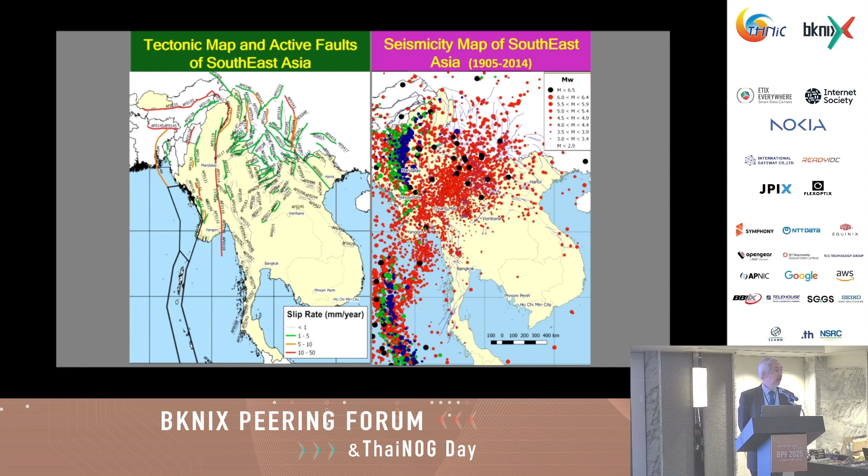In this region, you can see one long active fault that is called the Sagaing Fault. It is in the center of Myanmar, passing through many cities - Mandalay, Naypyidaw, Bago - and passes close to Yangon and goes down to the sea. So this is one of the most dangerous active faults in this region. And if we compare with many other active faults around the world, this one ranks in the top 3 in the world level. So this is the present condition regarding the earthquake.

Now, as most of you know, on 28 March this year, we had a large earthquake happening along the Sagaing Fault. It started around the Mandalay location, near the city of Mandalay in Myanmar. But it was created by the slip, or in engineering we call it the rupture - it's a kind of slip movement. One side goes north, one side goes south. So this slip along the fault, starting from Mandalay down to Naypyidaw, more than 300-400 kilometers long.

So you can see the red zone. Along this red zone, the ground shaking was extremely strong. And as you can expect, many buildings collapsed, many buildings damaged, a large number of casualties, mostly concentrated along the red zone, the yellow zone. But what surprised most of us is the impact of this earthquake then spread as far as Bangkok, about 1,000 kilometers from the epicenter, which is in Mandalay.

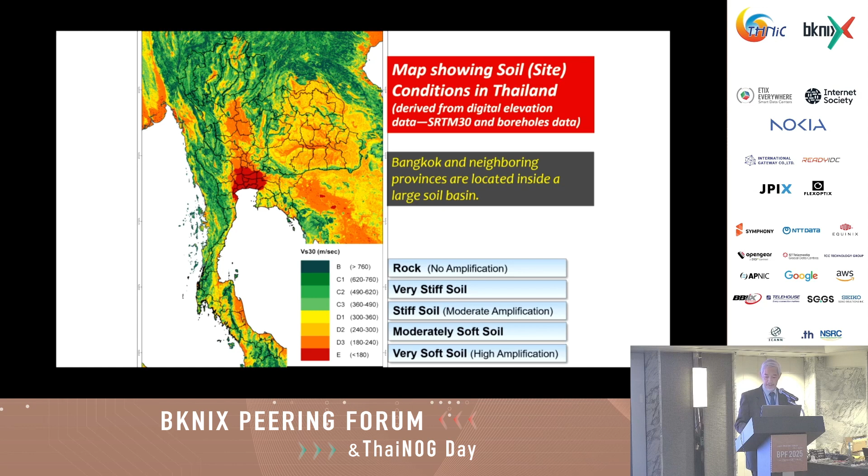Let me show you some examples from the past. Many years ago, we had a 6.8 magnitude earthquake in the north of Thailand, on the borderline between Thailand and Myanmar. We recorded the ground motion, one on hard soil in Surin province, another one in Bangkok on the soft soil basin.

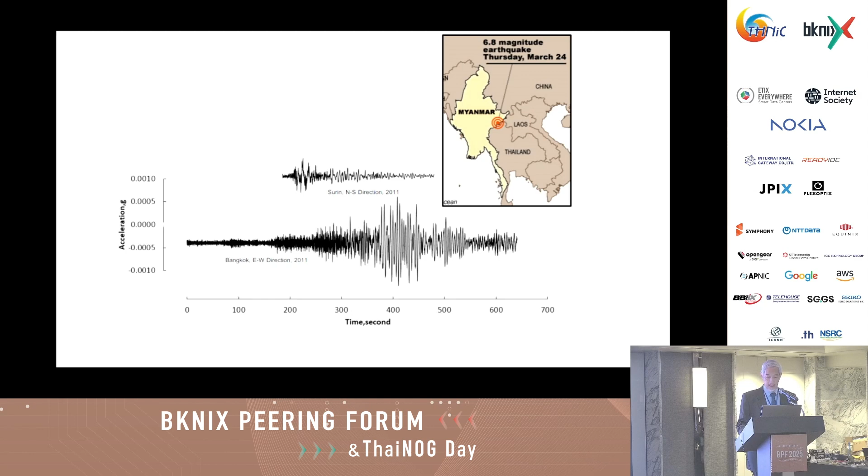If you compare them, the ground motion record in Surin is much lower in magnitude, in intensity, compared to that in Bangkok. And from this, we can calculate the impact of ground shaking to buildings in Bangkok and in Surin, converting the ground motion into a calculation of impact to the building.

But roughly, for a 10-story building, the natural period will be about 1 second. A 20-story building, natural period will be about 2 seconds. A 30-story building, about 3 seconds approximately. This is just to give you some rough idea.

And what you can see here is that buildings in Bangkok will have much more earthquake effect compared to those in Surin, because of the amplification effect of the soil basin.

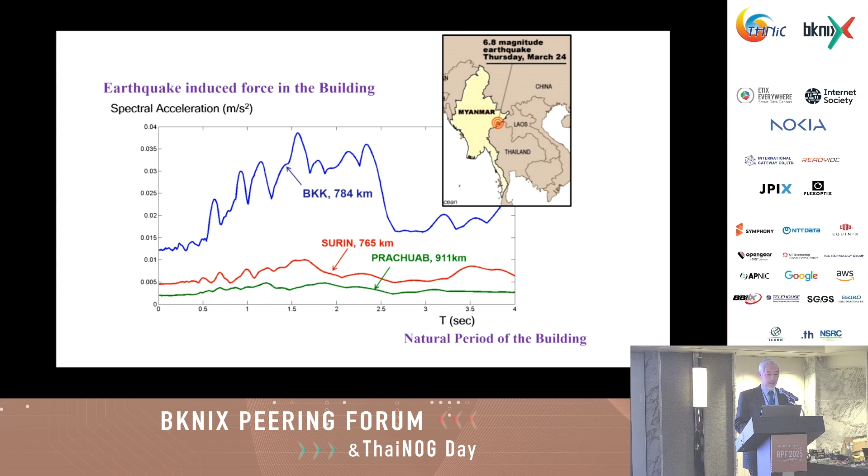Another point we can see from this graph is that buildings with relatively longer periods—1 second, 2 seconds, 3 seconds—will have more impact than buildings with shorter periods. So let me try to explain this point, I'll try to make it simple.

If the ground moves slowly, at a vibration period about 5 seconds, it's going to shake the long period structure, the tall one, because there is a matching between the ground movement and the vibration period of the structure. This is called the resonance effect.

Now, if we change the way the ground moves, making it move faster at a shorter period of 2.4 seconds, it's going to produce more impact to the middle one, which has a natural period matching the ground motion period.

And if the ground moves at a shorter period, high frequency, it's going to shake the small one.

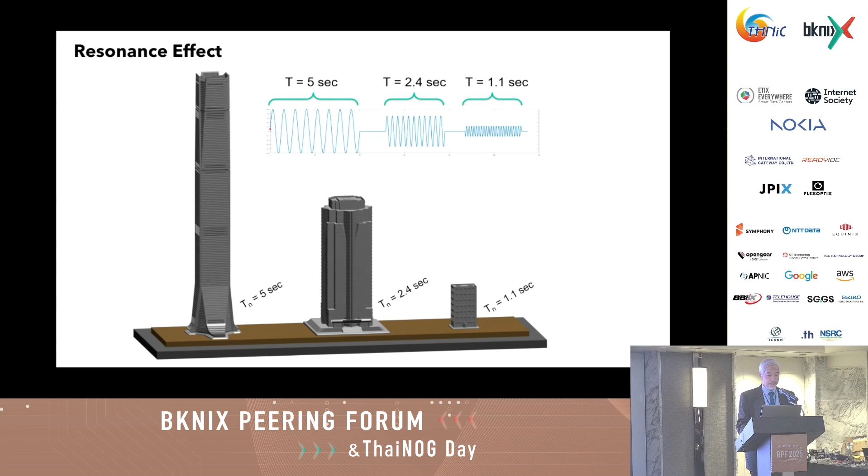Because of this question, our team spent many years investigating the Bangkok basin, applying a technique called array microtremor measurement. We conducted surveys at many locations inside this large basin, and we obtained the dynamic properties of the soil basin and the basic geometry of the soil basin.

This helps us make a model of the soil basin, and we can predict its amplification characteristics. We can determine what type of vibration period it will amplify, and how strong it will amplify it.

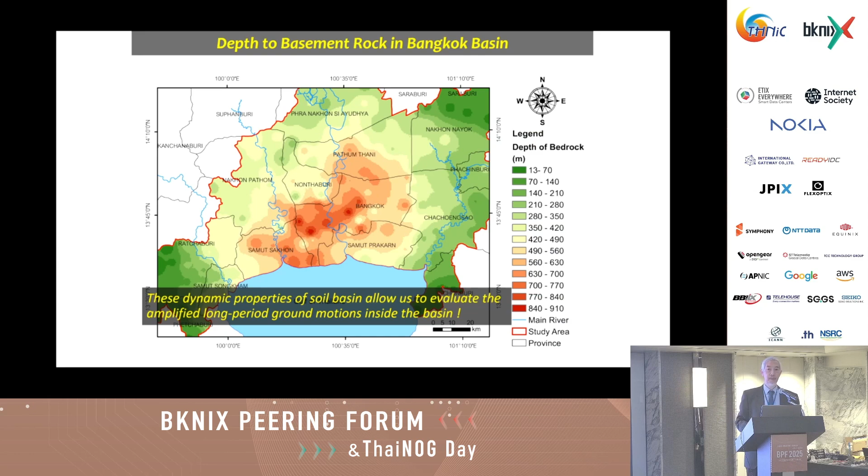After knowing the property of the basin, we combined it with seismic hazard assessment, considering all the possible earthquake sources, the distance from the source, and everything. We came up with a conclusion that Bangkok and surrounding provinces are at risk of disaster from distant large earthquakes.

I made this slide many years before the event on 28 March, and it's still true. We concluded that the city lies on a large and deep soil basin, which can strongly amplify long period ground motion. A large number of high-rise buildings with long natural periods will be strongly shaken by the resonance effect with this amplified ground motion.

Our team also predicted three possible earthquake scenarios that are quite dangerous for tall buildings. The first one is an earthquake of magnitude 7 to 7.5 in Kanchanaburi province, which is around 200 kilometers in the western part of Thailand.

The second one is an earthquake of magnitude around 8 at the Sagaing Fault in Myanmar. This second scenario already happened on 28 March. And the third one is an earthquake of magnitude around 8.5 to 9 at the Arakan subduction zone, which is on the western part of Myanmar.

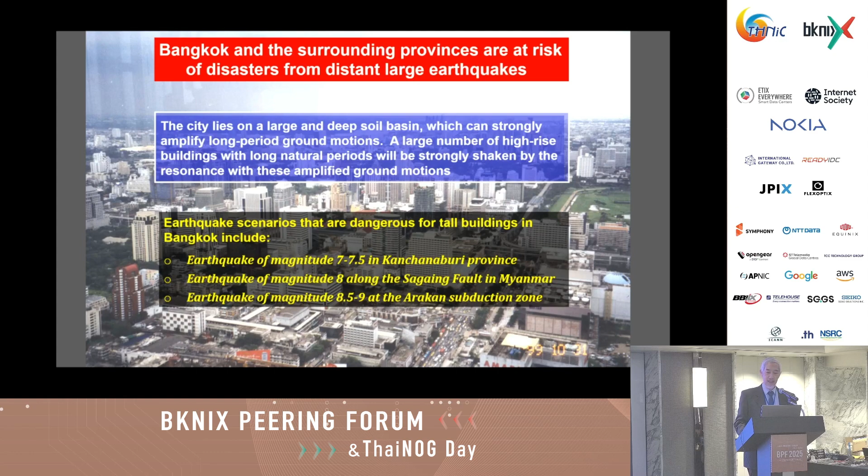But probably we are wrong. It just happened. After making this calculation, we explained that this is a rare event, but for some reason it has already happened.

Of course, after knowing this, we have been preparing for such a dangerous earthquake. We have a ministerial regulation that requires buildings to be designed and constructed for earthquake resistance since 1997. Ten years after that, in 2007, we expanded the control area to cover Bangkok and surrounding provinces. This means that since 2007, all tall buildings in Bangkok are required to be designed and constructed for earthquake resistance. That's the way we prepare for earthquakes.

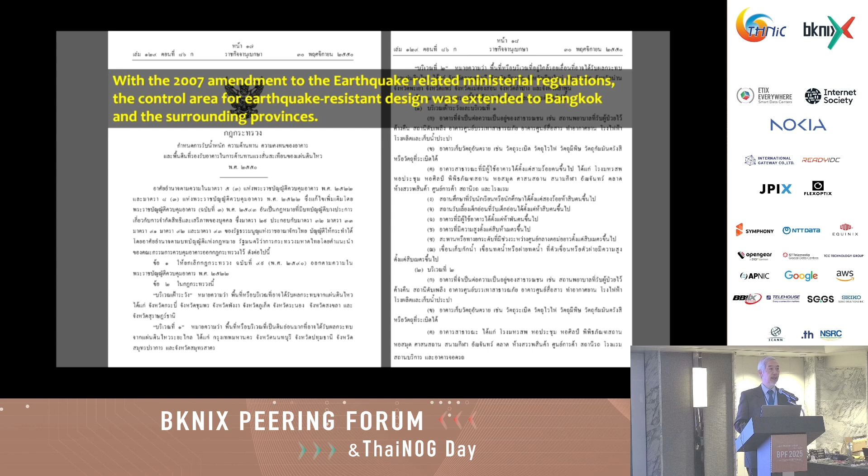We also developed a kind of national standard for seismic resistant design for buildings and structures. This is a new version, but the first version was issued in 2009, and this is a revised version from 2019.

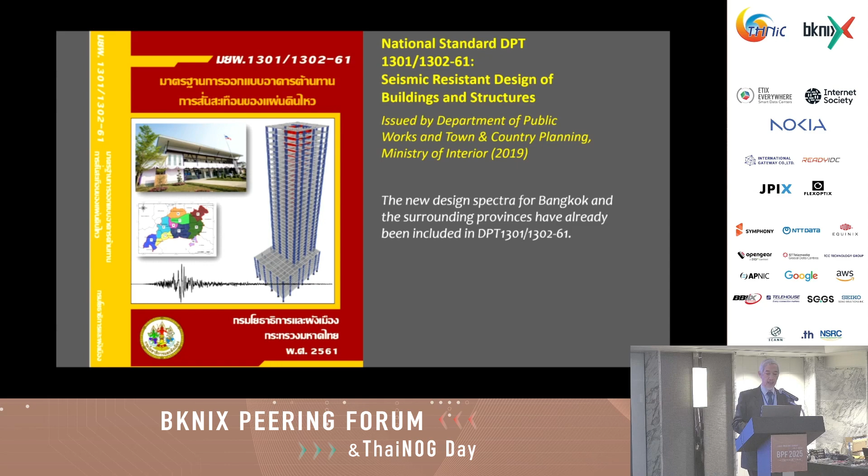In this national standard, we actually divide the Bangkok basin into 10 different zones, and each zone has a different design spectrum. The design spectrum defines the level of earthquake impact on different buildings with different natural periods. You can see a graph with 10 different curves for the 10 different zones.

So this is the best estimate before we had any earthquake, based only on the scientific information we had. Bangkok is in zone 5, and you can find the zone 5 curve on that graph. That is the way we tell our engineers that you should be prepared for earthquakes, and you should design your buildings and structures for this level of earthquake intensity.

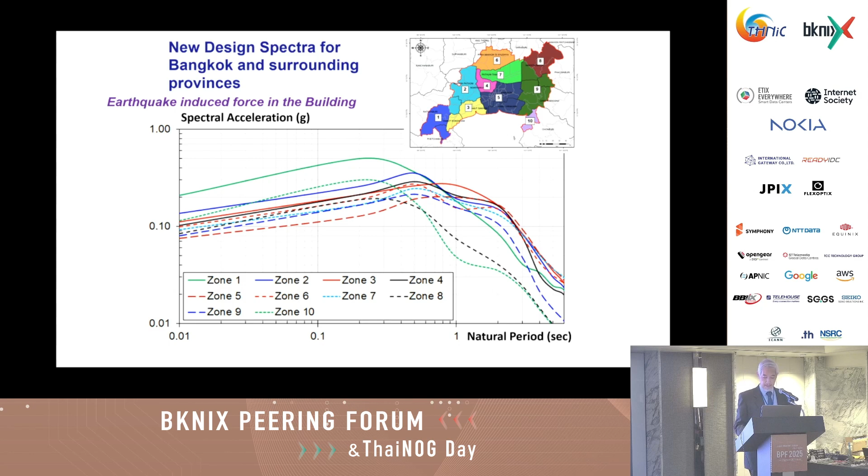And then it happened. On 28 March, the ground was shaken, and in Bangkok we have about 5 seismic stations available. From these seismic stations we have ground motion sensors, and we have recorded ground motion time histories available. So we can see how the ground moved, how the shaking looked like.

This is the station near Phra Chom Klao, Thonburi, KMUTT University. And this is near Sirikit Convention Center. So we have about 4 or 5 stations available.

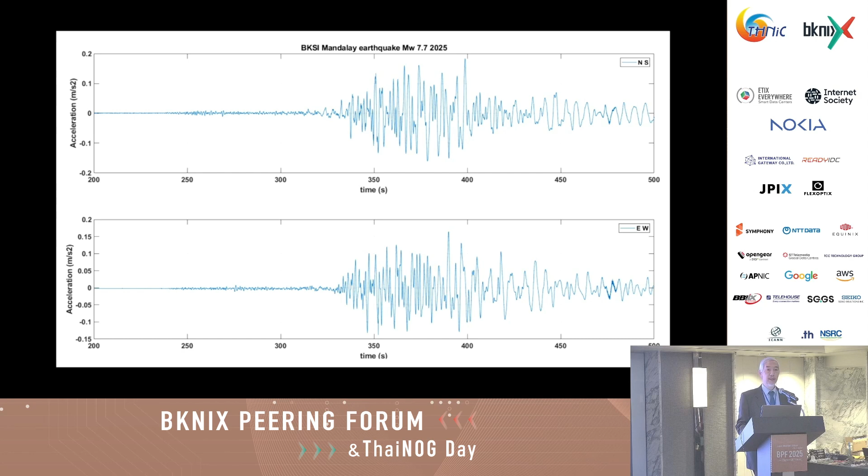The first thing we did after we obtained this record was to compare the ground motion record with what we put into our standard. So here's the graph. The vertical axis shows the spectral acceleration, which is related to level of earthquake-induced force in the building. The horizontal axis is the natural period. You can see the yellow curve and the violet color curve.

This represents the design basis earthquake, or DBE, and maximum considered earthquake, or MCE. This represents the maximum level of earthquake we expect to happen in Bangkok, with a very long return period of 2,000 years. The one that just happened on 28 March was the curve below in a different color. It was not as high as DBE, it was not as high as MCE, but when you look at the long period range, it's somewhat comparable.

And even for longer period range, at 6 seconds, it's slightly exceeding the level we estimate. Anyway, overall, we think that the ground motion that happened on that day, although it was the strongest ever experienced by most people here, strongest ever experienced by people in Bangkok and by tall buildings, is still within the limit that we tell engineers to design the buildings for. So if they follow the regulation properly, we should not see any disaster.

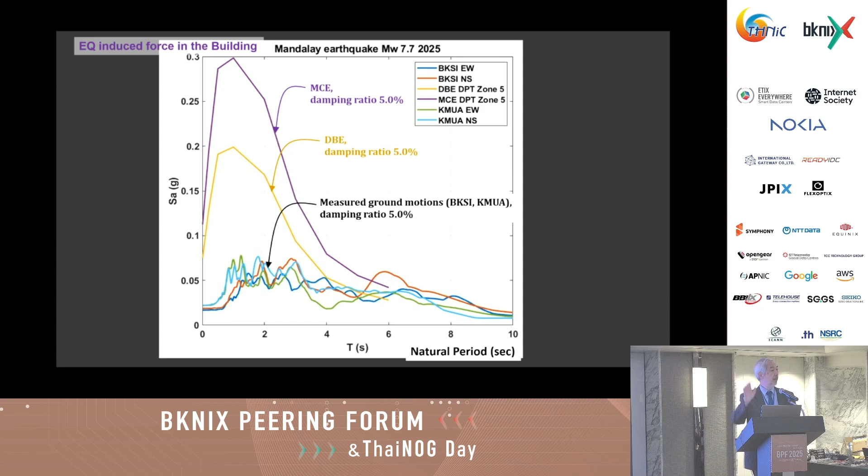So this is a rough statistic I got from the Thailand Structural Engineering Association. They conducted many surveys by volunteer structural engineers, and reported that around several hundred buildings have damage to non-structural components like masonry walls, partition walls, ceilings, elevators, and many other non-structural elements. That's several hundred buildings, which, although not impacting the structure, actually gave a strong impact to the functionality of the buildings.

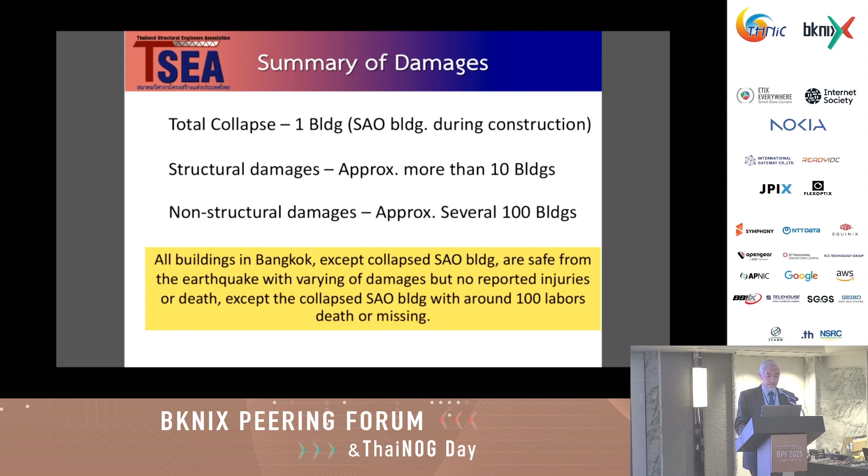And we have just about 10 buildings that have damage to structural components, especially the reinforced concrete wall, which is considered an important structural element. And one building, a state auditor office, a new building, completely collapsed. That collapse is beyond our expectation.

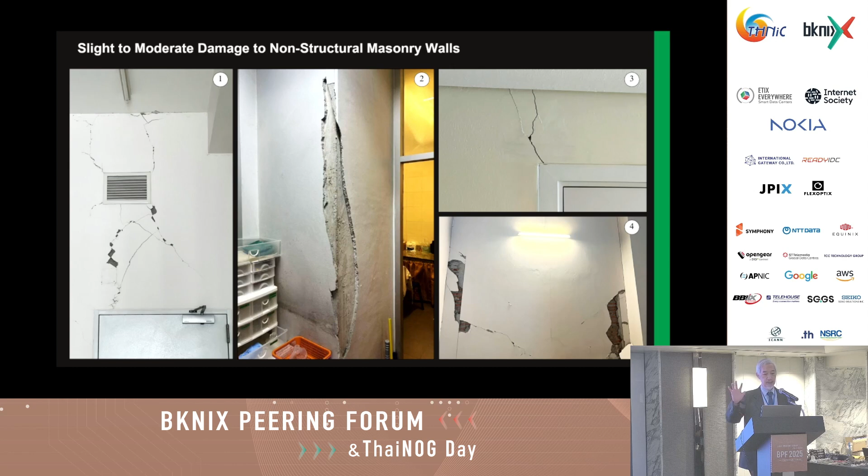So this shows you the idea of slight to moderate damage. I show you just the damage to masonry walls and partition walls. This is a small level, slight to moderate. But in some buildings, we can see more severe damage where you can see through to the other side - this non-structural wall damage is not affecting the safety of the structure.

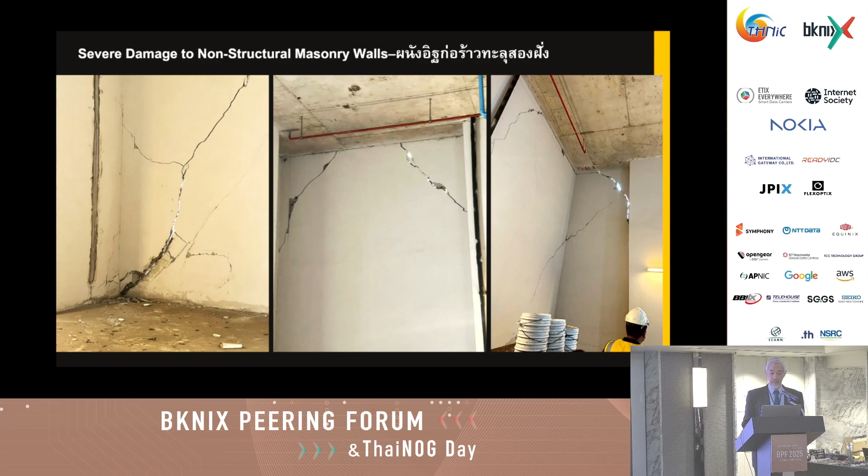But in less than 10, or around 10 buildings, we have this level of damage we call significant structural damage, where you can see damage to the structural wall. This is a reinforced concrete wall - the concrete crushed and the reinforcement steel bar buckled. This appears to be quite dangerous. This is beyond what we expect.

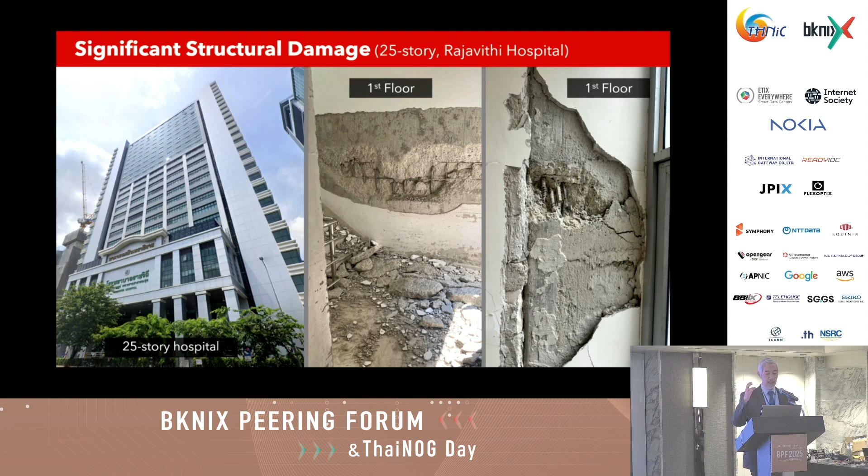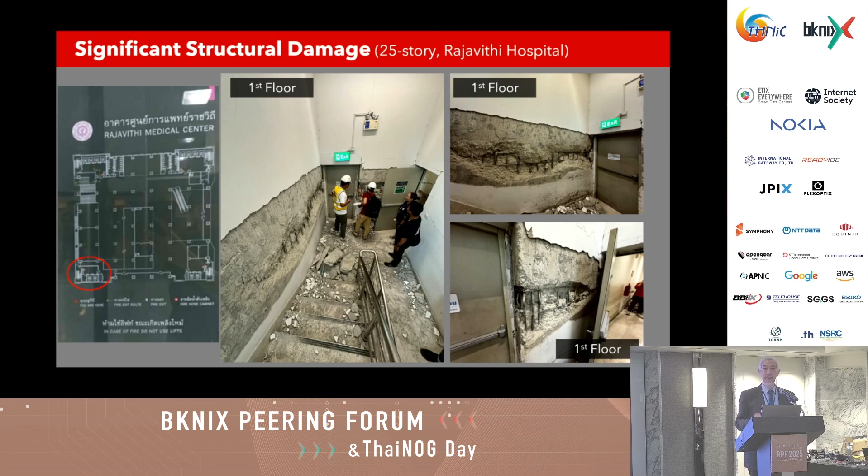And the type of failure is considered to be a brittle form of failure, which is quite dangerous because when this happens, it means the structure cannot deform further. If it's subject to slightly stronger shaking, it may lead to danger - it may lead to collapse. So damage to structure is the main concern for structural engineers.

And this is another one - tall buildings with damage to structural walls all around. Fortunately this one is still standing, and some brave engineers are trying to repair and reinforce the structure.

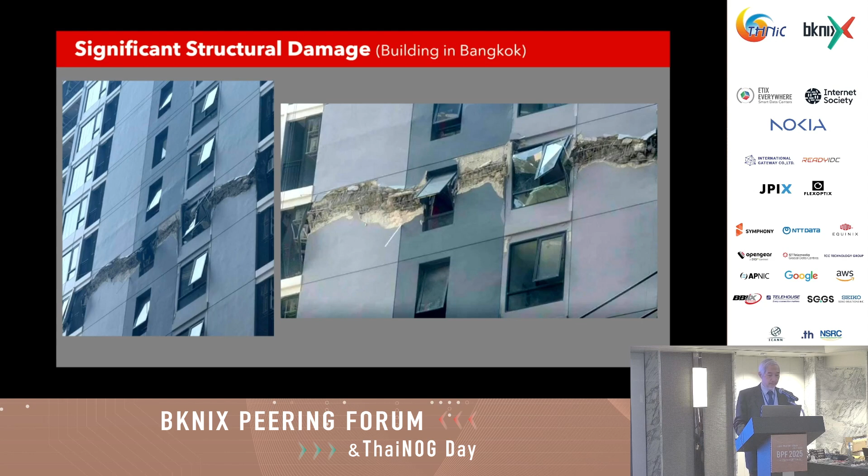So when we compare with damage reported elsewhere, I think we find more or less the same picture. This is in Chile, when subject to a strong earthquake - many structures with shear walls, with reinforced concrete walls, also damaged in a similar pattern.

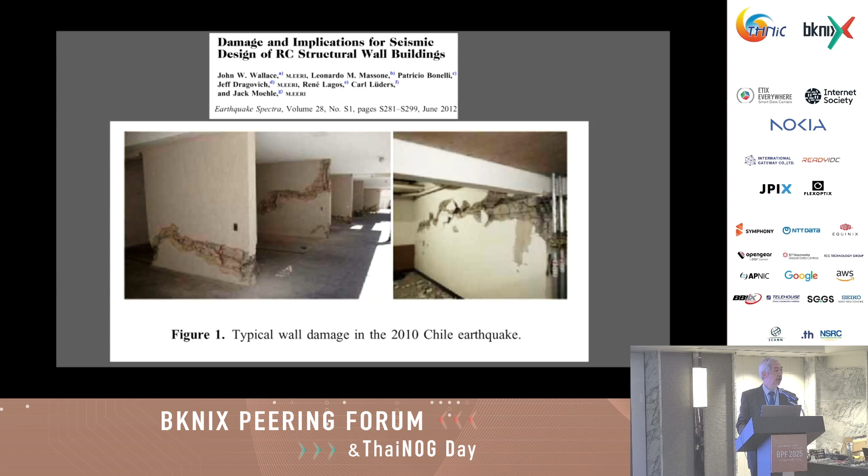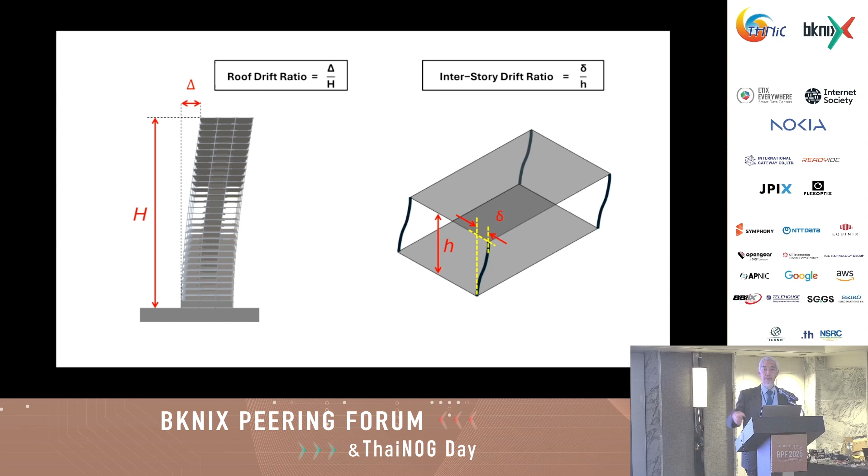We are actually trying to learn from this event, collecting data to understand its impact on many different buildings. So we're trying to calculate one index that we think will best represent the damage level: the maximum rooftop displacement of the structure, called roof drift, divided by the height of the building, delta over h, which we call the roof drift ratio. We believe the damage to buildings, large or small, will be roughly proportional to this index. After using the available ground motion data, we calculated the roof drift ratio, and it came out like this.

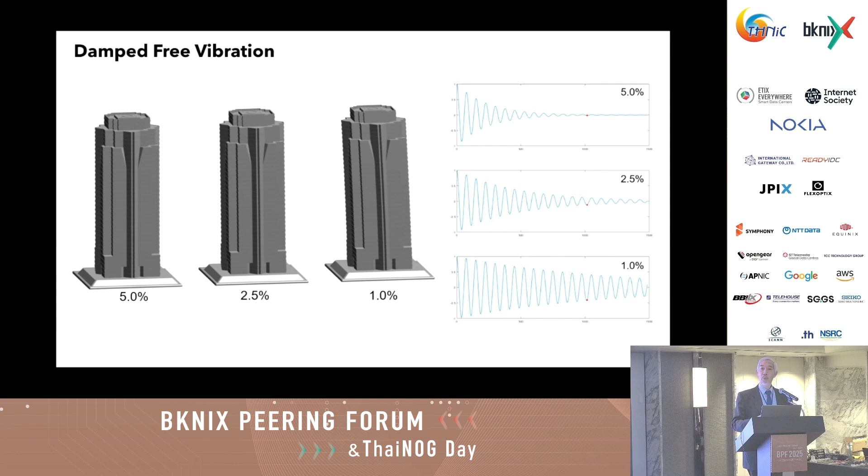Why is this point important? Because if we check these 3 buildings with different damping under the same ground motion, the one with 5% will not have high amplitude. The one with 2.5% will have higher amplitude. And the one with 1% will have the highest amplitude. So this controls the level of impact of earthquake on a tall building through this important parameter.

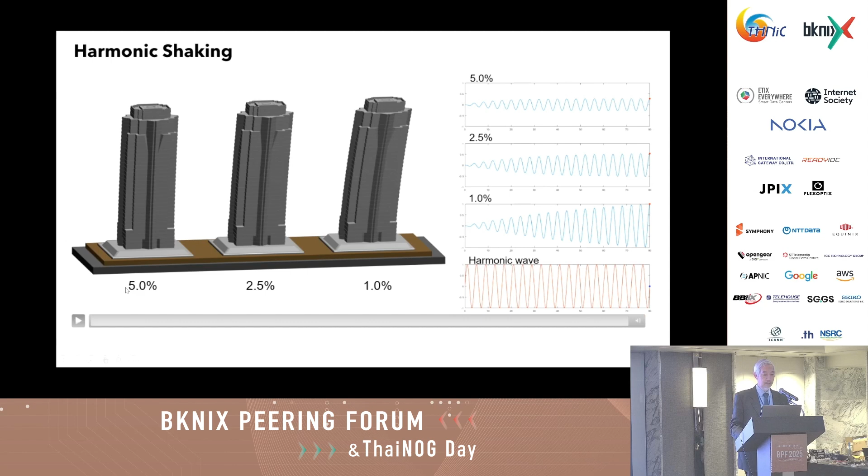But that is the calculation from one ground motion. That ground motion is from a station near Chatuchak area, near the Bangkok Metropolitan Administration Office.

How about the structure? We've been talking about impact to non-structural components. If a structure is properly designed, made ductile, well designed for earthquake resistance, I think we can go up to 2%, not this level—this level is about 0.6 to 0.7 percent maximum. But if we design a structure to deform well, a ductile system, we can go up to 2%. So we don't have to worry about this level of earthquake if we implement proper seismic design.

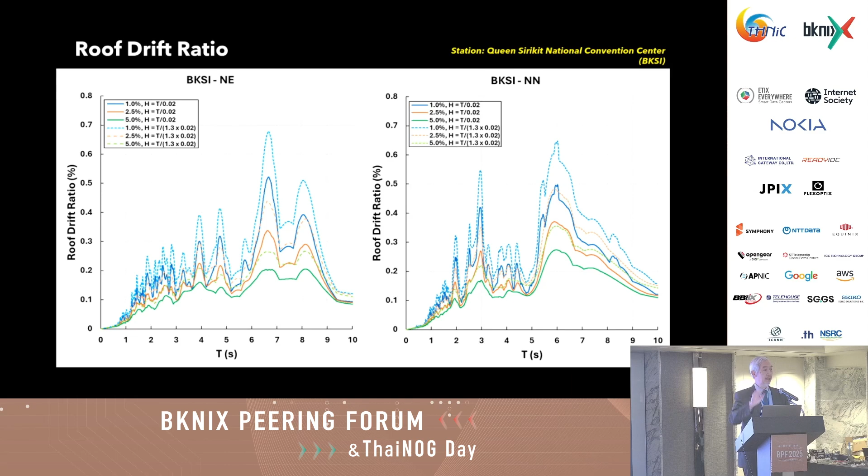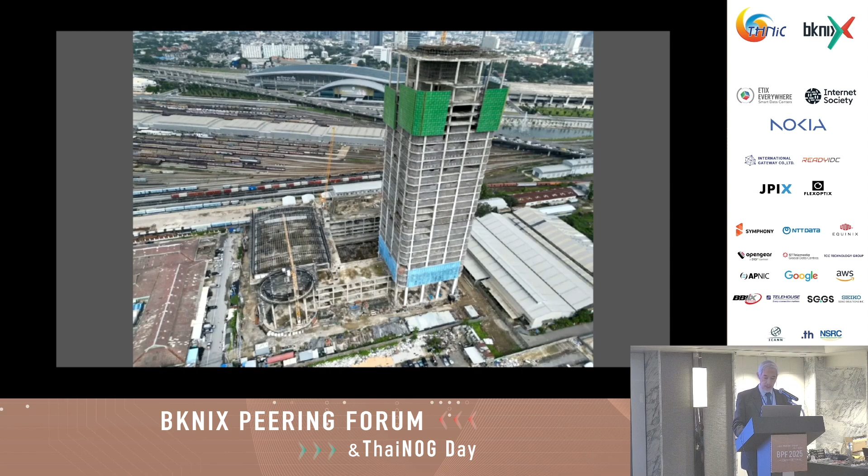So this is for the Thonburi side. Now, this is the State Audit Office, the one that collapsed. We also made some calculations. The reason for the collapse is still under investigation, which I cannot say yet, but I am a member of the investigation team. Initial analysis shows that it falls into the range near the peak of 3 seconds, so it's possible it experienced a stronger impact than many other buildings, because its natural period happened to match the peak effect, as you see in the graph. That is one of the key factors leading to the collapse, but there may be many other factors—that's another story to tell later.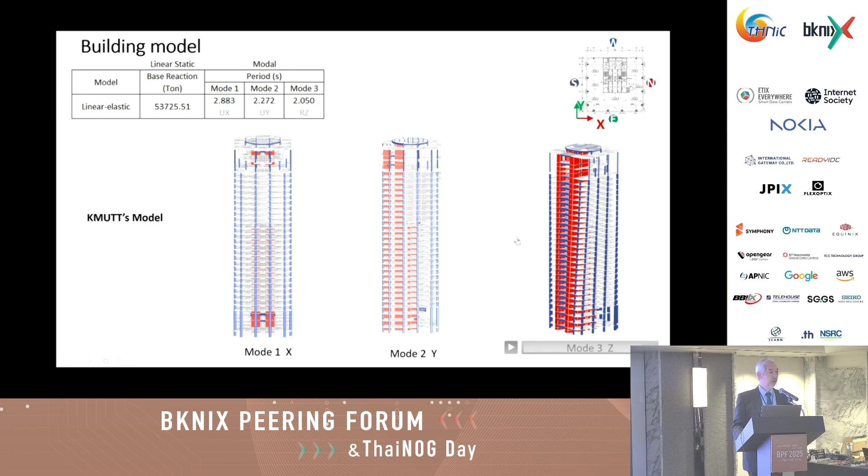Now I come to the last part. So what do we have to do, or what do we need to prepare for future earthquakes?

As you can see here, this is the Sagaing fault. The rupture is from Mandalay to Naypyidaw. The rupture does not go from the top to the bottom of the fault yet—the fault is more than 1,000 kilometers long, and only part of it has ruptured. In the future, it may continue to rupture from Naypyidaw, passing through Bago and Yangon, and down to the sea. So we have to assess how much of a possibility that is.

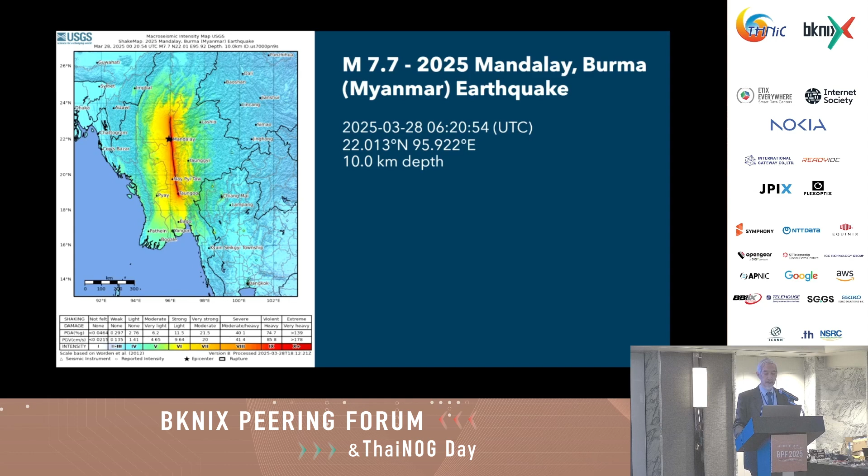To understand that, we have to look at the history of earthquake ruptures along this fault. I put it horizontal instead of north-south. This shows the time, and this line shows the rupture zone. The recent one ruptured between here and here, from Mandalay to Naypyidaw. The other horizontal lines show ruptures in the past. In Mandalay, there were ruptures in 1956 and 1912. In Naypyidaw, there was a previous rupture in 1839. So it doesn't happen easily—the past event in Mandalay was many years ago, and the past event in the Naypyidaw zone was nearly 200 years ago.

How about the possibility of rupture from Naypyidaw down, passing through Pyu, Bago, and Yangon? The past event there was around 1930, so that's about 90 years ago.

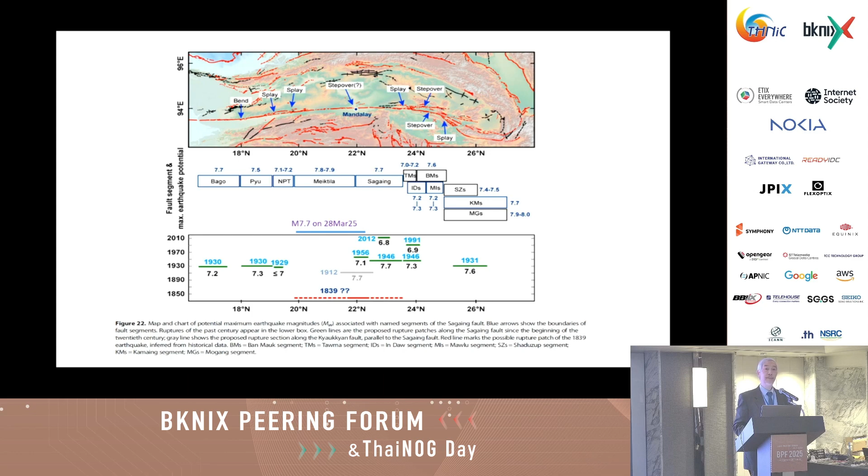If it happened like this one, 1930, 7.3, 7.2, the impact to Bangkok may not be that strong. But if it's a long rupture, 7.7, like the one on 28 March, the impact will be stronger than what you experienced on 28 March, because it becomes closer.

So what we think, there's several ways to do it. One way is do nothing, because the chance of it happening is quite rare. The chance is low.

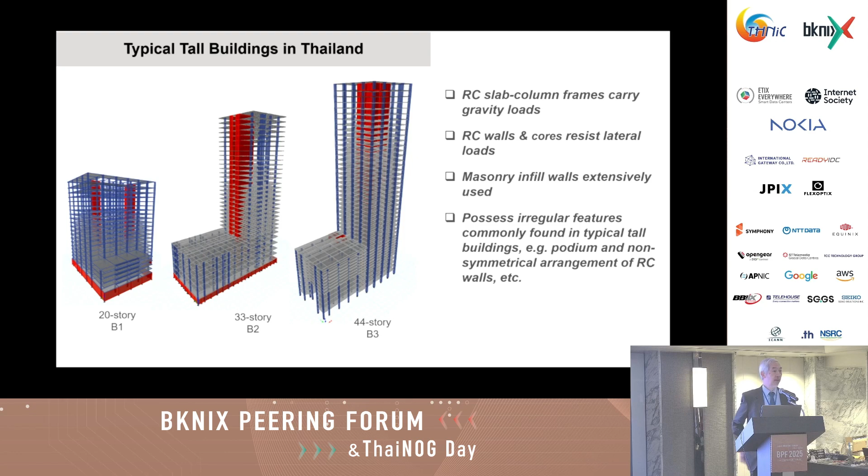Another way is to improve the structural system for future buildings. We think it's possible to make the structure more resistant to such long period ground motion. I will not go into detail, but the idea is summarized in one keyword.

We want a ductile structural wall. It is possible to design the reinforced concrete wall to be more deformable, more ductile.

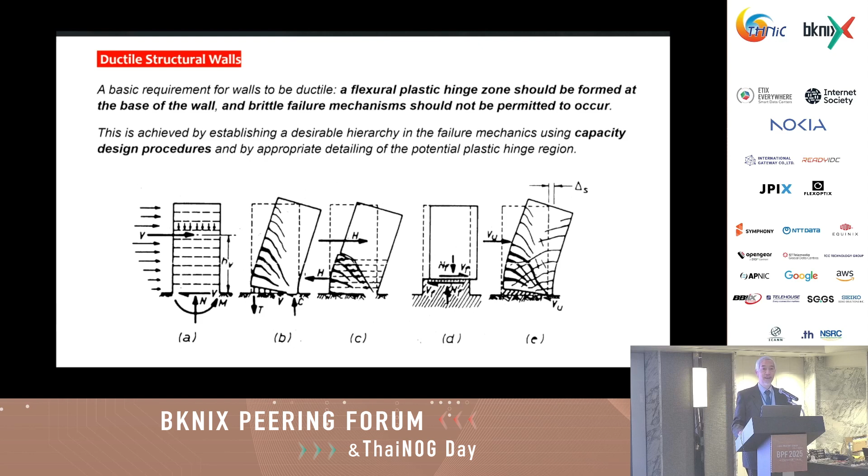But in engineering, to do that, we should make sure it will not fail in brittle mode. There's a long list of brittle failure mechanisms. So in order to make the wall ductile, structural engineers will have to control and make sure all these brittle modes will not happen. They have to take care of all this detail — make sure it will not fail in shear, will not fail by out-of-plane instability, will not crush.

All this can be done by good engineering practice. In the past, we had that in the standard, but it may not have been that clear. But after this earthquake, I think we are going to focus more on this and improve further.

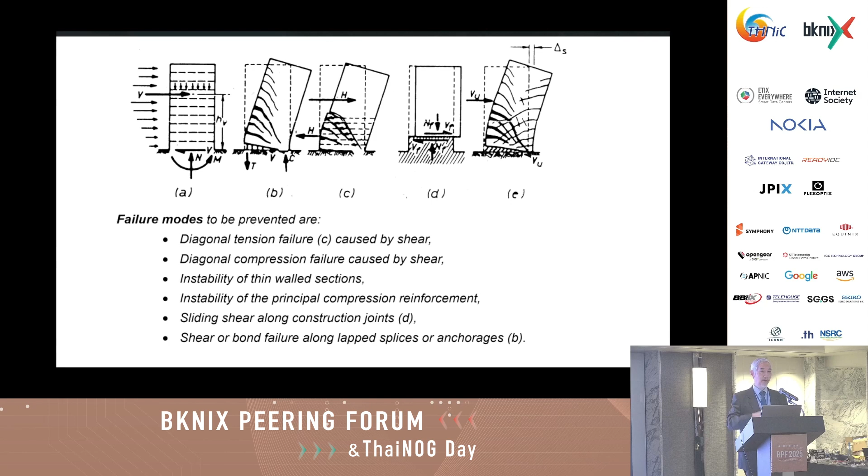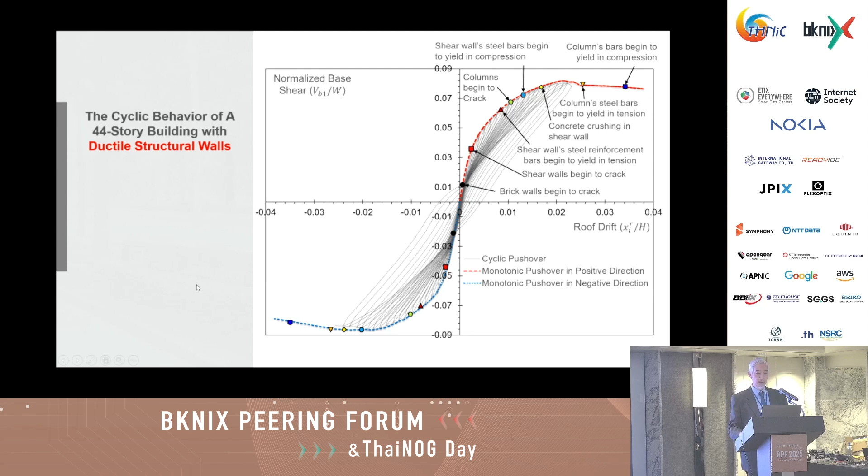After we have a ductile wall, the structure can deform up to more than 2% roof drift. So when we come back to this, the capacity of the structure will go above this level — not 0.6, not 0.5, not 0.7, but 2%, if we can make the structure ductile.

If we go with this measure, the structure will be safe — you don't have to run out of the building. But your non-structural components may be damaged. Your non-structural walls will have cracks, slight to moderate or severe.

Your elevator may have problems. Your ceiling may have damage. Your water and electrical systems — your building may not be functional. So even though the structure may be safe, you may not be able to use the building if it's hit by such a severe earthquake again.

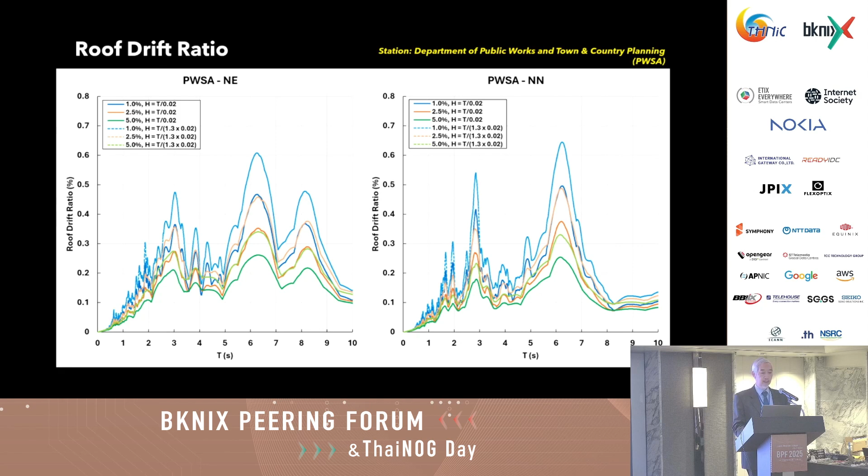This technique is used a lot in Japan, but has never been considered in Thailand. But after this event, maybe this is the first technology we need to come back and look at. If we want the structures or buildings to be functional even after a severe earthquake in the future, maybe this is one attractive option to consider.

So I think that's all I want to explain about what we learned from this earthquake event. Thank you very much for your kind attention. Thank you.